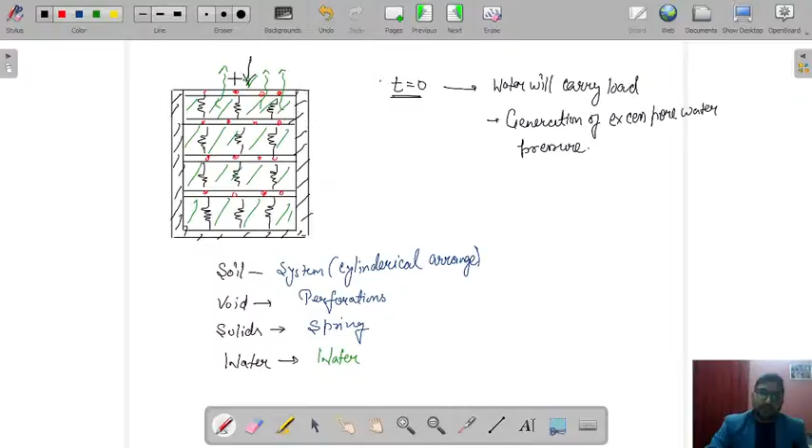Now what is excess pore water pressure? The pressure above the initial value. Suppose I put a piezometer in the middle of this layer, another piezometer at this point, a third piezometer at this point, a fourth piezometer here. Initially the level of water in these piezometers is going to be here. This is the water level.

Now suppose we have applied a stress of sigma. If this stress is taken by water, the rise in the level of water is going to be sigma upon gamma W, right? So the water level rises by H. It means the excess pore water pressure is equal to gamma W into H, yes or no? So this was the arrangement.

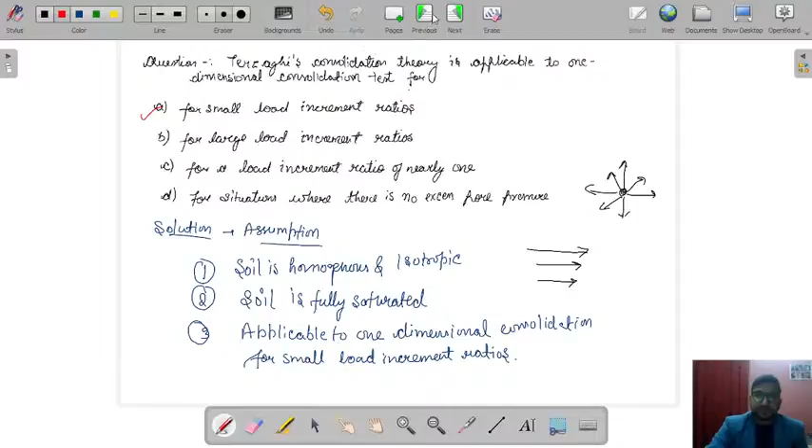Okay, let's move to the next question. Try to solve this one. The question is MCQ type, meaning only one of the options will be correct. The question reads: due to the construction of a new structure, the average vertical pressure at the center of a 2.5 meter thick clay layer increases from 100 kilopascal to 200 kilopascal.

A laboratory consolidation test was performed on a 20 mm thick undisturbed sample of the clay under applied stresses of 100 kilopascal and 200 kilopascal. The void ratio of the sample was found to be 0.9 and 0.786 respectively. Compute the primary consolidation settlement.

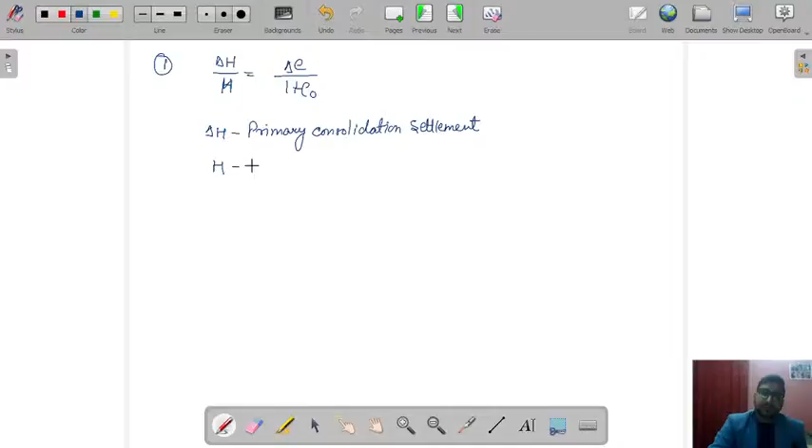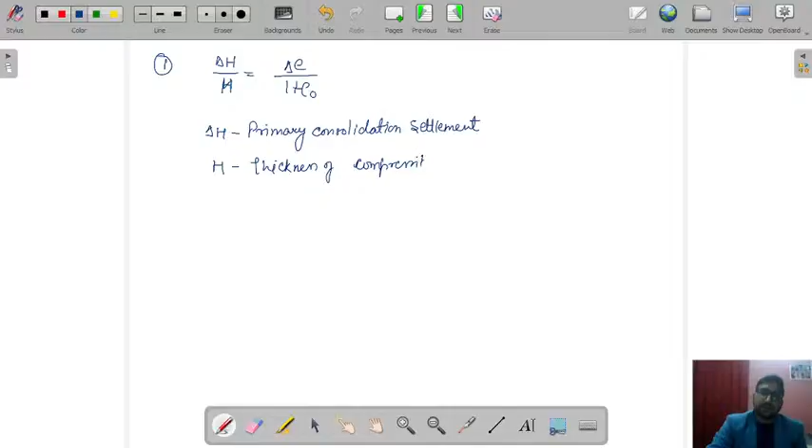So you can find the primary consolidation settlement. Here delta H is our primary consolidation settlement. What is H? H is the thickness of compressible layer. What is delta E value? Delta E is our change in void ratio.

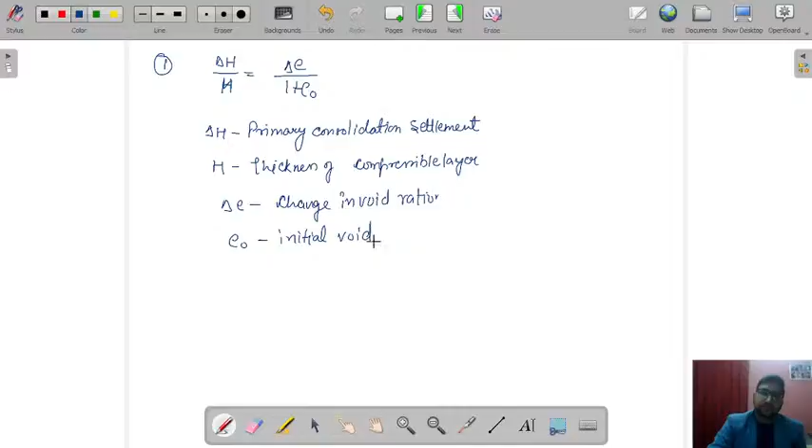What is E naught? E naught is our initial void ratio. Second, we know delta H is equal to H naught mv delta sigma bar. What is mv here? mv is coefficient of volume compressibility. mv is given by Av upon 1 plus E naught.

Now what is this Av? Av is our coefficient of compressibility. I'm assuming that you know what is coefficient of compressibility. It is the slope of curve between the effective stress and void ratio. With change in effective stress, what is the change in void ratio? The slope of that curve is our coefficient of compressibility. It represents the magnitude of consolidation. Right.

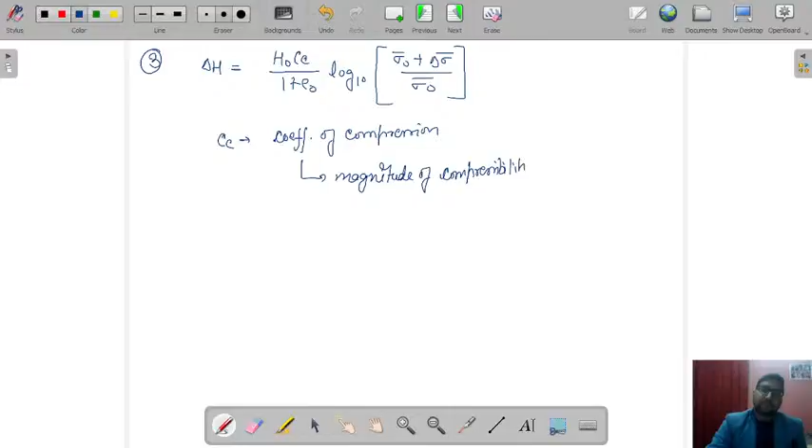Now just see what data are given. Delta sigma bar is given for the 2.5 meter thick layer. Also delta sigma bar is given for the 20 mm sample which we have tested in the lab. The change in void ratio is given from 0.9 to 0.786. Now as the increment in stresses are same, it means your MV value is going to remain same.

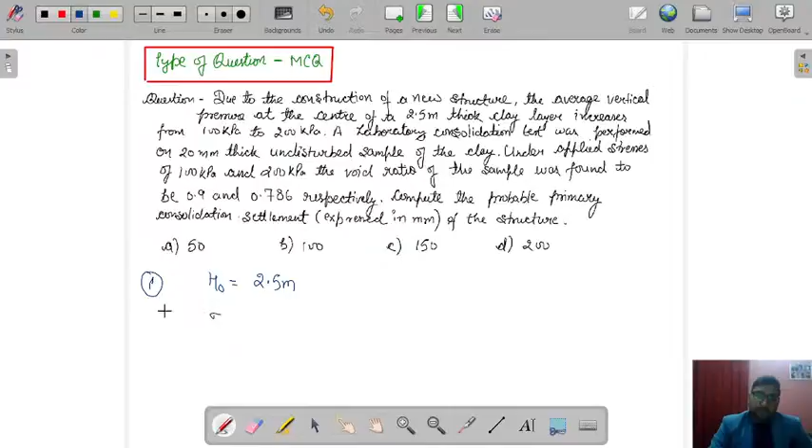Right. So first method, how we can calculate? H naught is our 2.5 meter. Sigma naught bar is given as 100 kilopascal. Sigma 1 bar is given to us, that is 200 kilopascal. Now this is for the soil in the field. Also, the soil sample which we have taken for the lab test is also given.

What is H naught here? 20 mm. What is sigma naught bar? 100 kilopascal. Let's take it as sigma 1 bar. Sigma 1 bar is 200 kilopascal. Now, initial void ratio is given. When stress was 100, void ratio is given as 0.9. Final void ratio is also given as 0.786.

Can we calculate the value of MV? MV is equal to AV upon 1 plus E naught. AV is the change in void ratio with change in effective stress. This type of curve we generally get. Here it is void ratio, here it is our effective stress. So initially the effective stress was 100, then void ratio was 0.9.

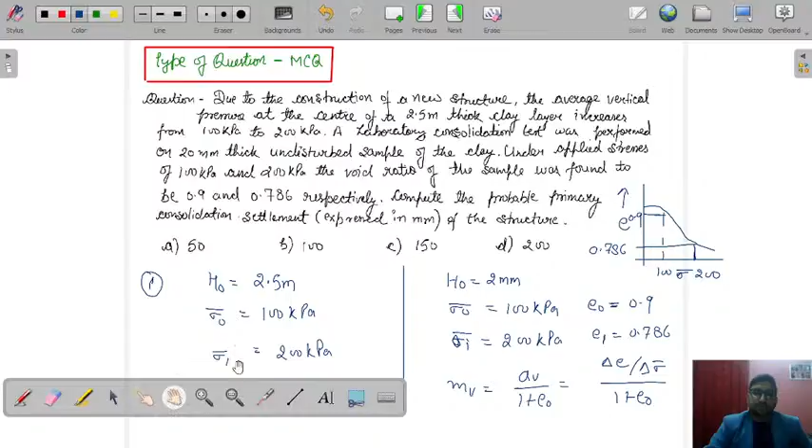So, just put the values. Delta e, 0.9 minus 0.786, by 200 minus 100, divided by 1 plus e naught, 1 plus 0.9. Can you give me the value of mv? What is the value of mv? So mv value we are getting as 0.0006.

What will be the unit? Meter square per kilonewton, since stress is in kilopascal. Right. Now mv value is same. I can calculate delta H here. I need the settlement delta H. It is equal to H naught mv delta sigma bar. What is the value of H naught? 2.5. What is the value of mv? 0.0006, into delta sigma bar is 200 minus 100, that is 100.

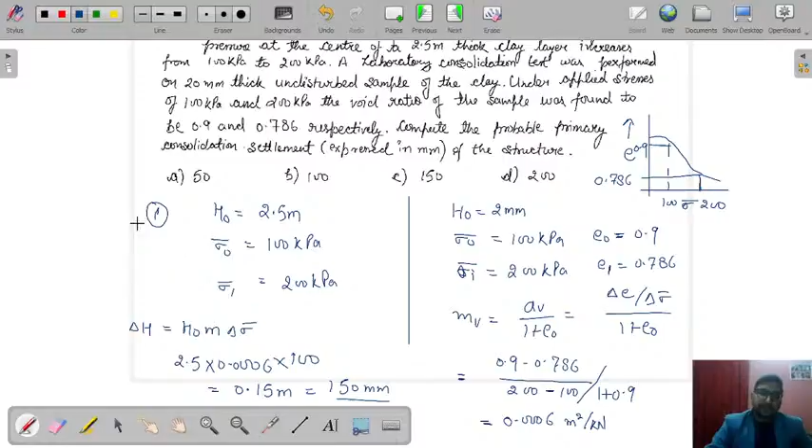So 0.15 meter, or you can say we have to answer in mm. It is 150 mm. You can also calculate directly without calculating mv. As the stress change values are same in your original soil and in the soil sample which you have taken to the lab, you can directly use delta H upon H naught is equal to delta e upon 1 plus e naught. You can also do it this way.

So H naught is our 2.5, delta e 0.9 minus 0.786, upon 1 plus 0.9. Still you will get same value, that is 150 mm. Okay.

Is there any doubt with this question? I hope this question is now clear to you. Let me know in the comment box if any student is having any doubt. Okay. So we will move to our next question.

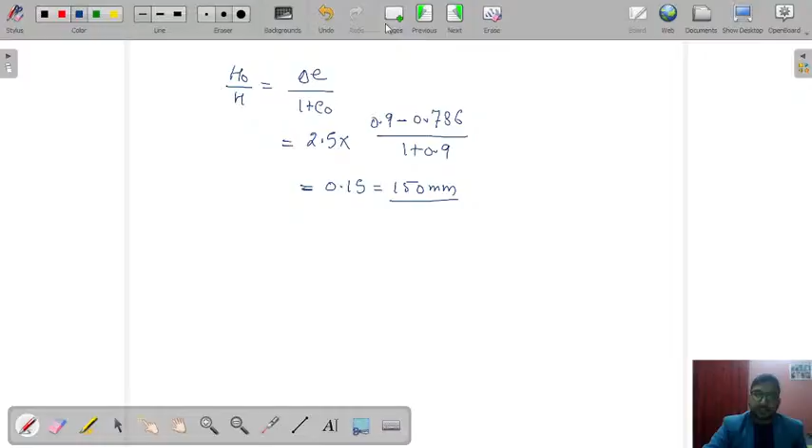This is our next question from the settlement. Answer this one. The consolidation settlement of a new structure founded on a 6-meter thick layer is estimated as 77 mm. The structure was found to have settled by 21 mm in 8 months after the completion of construction. If the clay layer is underlain by rock and overlain by a layer of coarse sand, the coefficient of consolidation of the clay layer will be?

You have to answer the coefficient of consolidation of clay layer. Answer this one. Just try to solve. See the data. Make a flow chart to solve the question. If that flow chart is complete, then only go for the question. It's not like you note the data, try to solve it, and after a point conclude that you don't know the concept to solve this question. That will be a time waste, right?

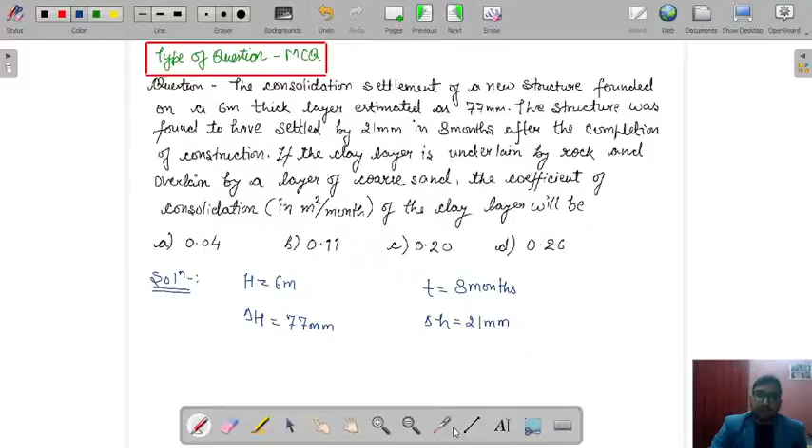Now at any particular time, at t equal to 8 months, your settlement value is 21 mm. Can you tell me what will be the degree of consolidation? Degree of consolidation represents, at any particular time, how much percentage of consolidation has taken place.

So degree of consolidation is delta small h upon delta capital H into 100. Okay, 27.27%. It is less than 50%. It means if we calculate the time factor, it will be equal to pi by 4 into u percentage squared.

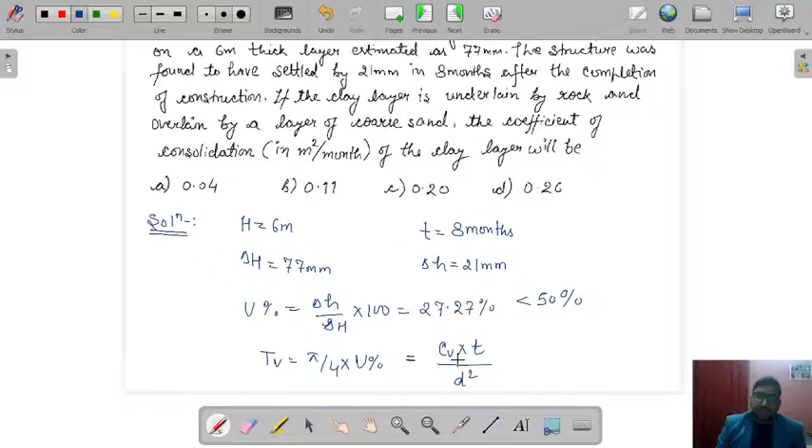We also know the value of TV. It is CV into T upon D square, where CV is our coefficient of consolidation, T is the time taken, D is the drainage length. Now suppose this is the soil sample.

Here it is clay, this is our sand, and here it is a rock. It means this layer will be an impervious layer and this layer is going to be a pervious layer. The drainage path is the maximum distance taken by a water molecule to expel out from the layer. So the value of D is 6 meters.

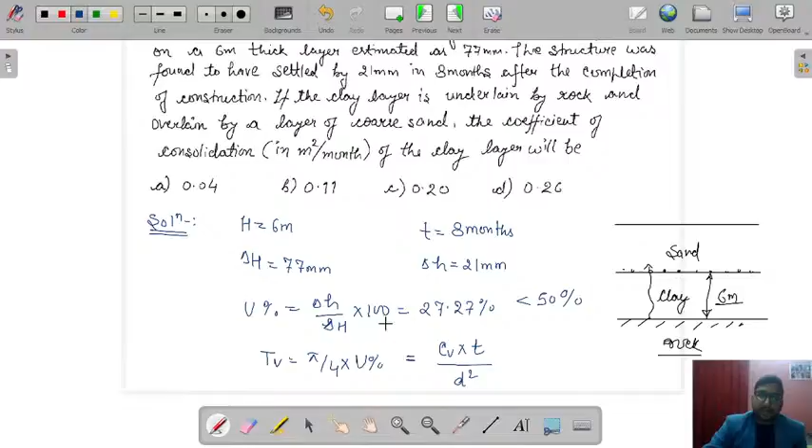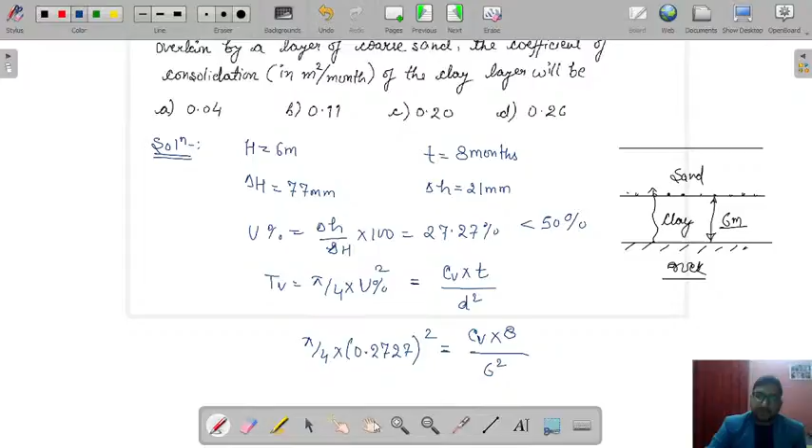Okay, so just put the values. Pi by 4 into 0.2727 squared is equal to CV, which needs to be calculated, into T, that is 8 months, divided by 6 square. Can you give me the value of CV? What is the value of CV you are getting from here?

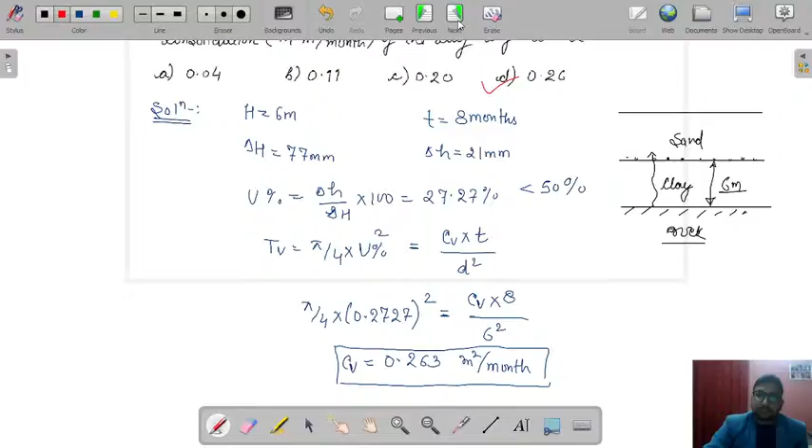0.263. What will be the unit? Meter square per month, as the time is in months. So the correct answer for our question will be option D. Yes, Harsha has given the correct answer, 0.26. Okay, next question.

A clay sample, originally 28 mm thick, at a void ratio of 1.02, was subjected to compressive load. After the clay sample was completely consolidated, its thickness was measured to be 23 mm. What will be the final void ratio? Try to answer this one.

Again, the hint is there is a settlement from 28 mm to 23 mm. Whenever there is a case of settlement, we have discussed three formulas. So try to see according to which formula the data is given to us. Before starting the question, can you tell me the value of settlement? By what amount has this clay sample settled?

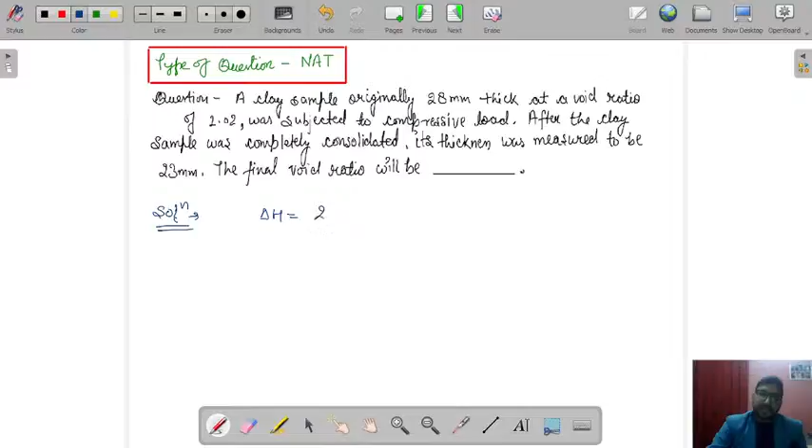Its original thickness was 28 mm. After complete consolidation, its thickness is measured to be 23 mm. Can you tell me the value of settlement? The initial thickness was 28 mm, and finally after settlement the thickness became 23 mm. So the value by which our soil layer settled is 5 mm.

Now this 5 mm settlement is of which layer? Having a thickness of 28 mm. When the thickness was 28 mm, the void ratio is given, meaning the initial void ratio is 1.02. Now settlement values and void ratio are given, so we can use delta H upon H equal to delta E upon 1 plus E naught.

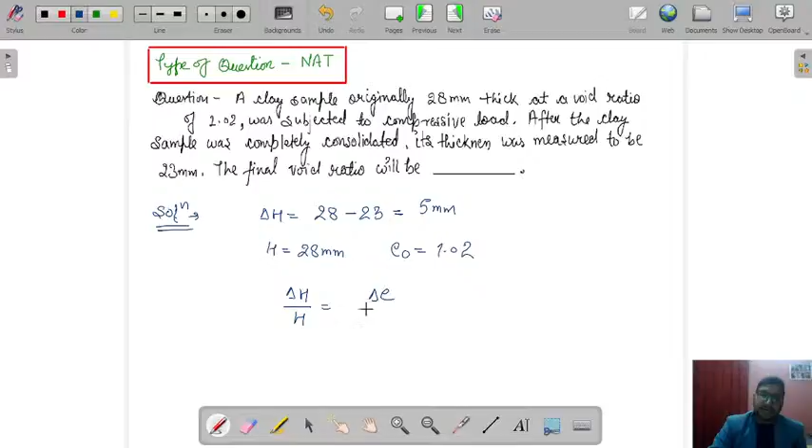What is delta E? Delta E is change in void ratio, that is initial void ratio minus final void ratio, divided by 1 plus E naught. Delta H value is 5 mm, total thickness 28 mm, equals 1.02 minus E final, which we need to calculate, upon 1 plus E naught, with initial void ratio 1.02.

Can you tell me the final void ratio? What is the final void ratio you are getting? So the final void ratio is 0.66. Our answer will be 0.66.

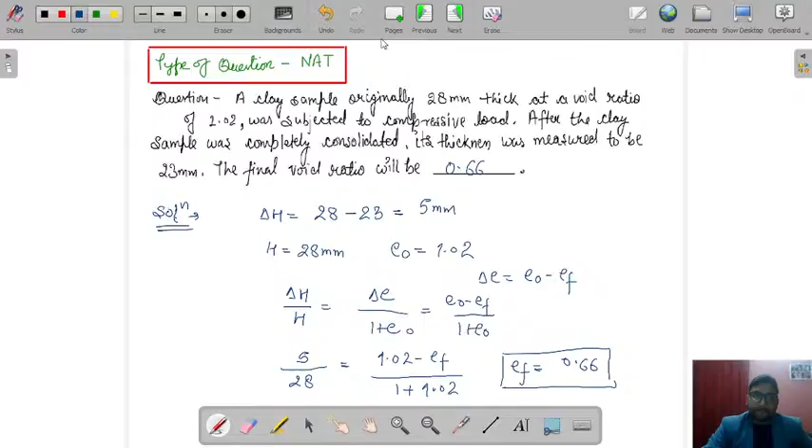Okay, now this question is clear. Just move to next question.

Now it is given, if the time required for 50% consolidation of a remolded soil sample of clay with single drainage is T, then what is the time required for 80% consolidation of the same sample of clay? Same sample of clay. Just try to answer this one.

Just try to answer. If the soil sample is same, which value is going to be constant? Now this is your hint. When it is given that the same sample of clay, it means you can compare both the condition on those values which are constant.

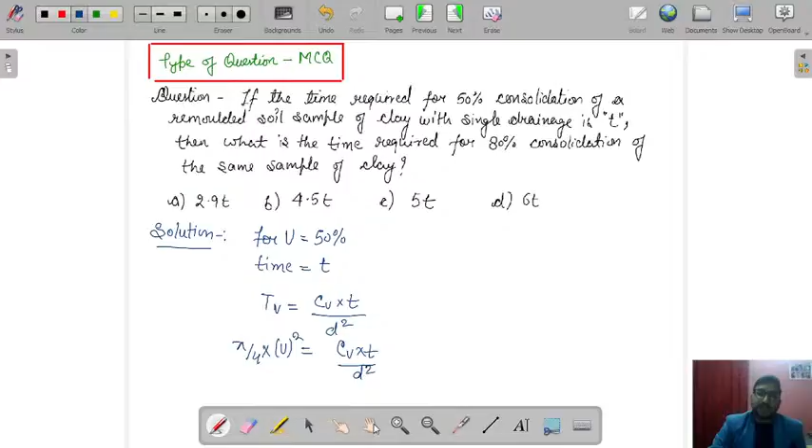For U is equal to 50%, what will be the value of Tv? Pi by 4 into U square. It is going to be equal to Cv into t by d square. Now just put the values. Pi by 4 into U is 50%, 0.5. Cv by d square, let's take t here. Just make it quick. Equation 1. Now let's see the second case.

For consolidation it is given 80%. It is greater than 60. So Tv will be equal to 1.781 minus 0.9332 log base 10 of 100 minus U in percentage.

Tv will be equal to Cv into, suppose the time taken for 80% consolidation is T1, by d square, as there is no change in the drainage length. Just put the value, it will be equal to 0.566, right? Now Cv upon d square, it is 0.566 by T1.

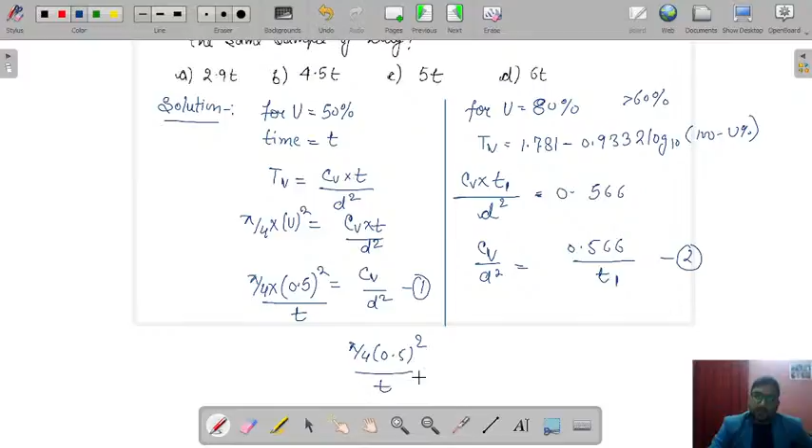Now just compare equation 1 and 2. So pi by 4 into 0.5 square upon t will be equal to 0.566 upon T1. Try to calculate the value of T1 in terms of t. 0.566 divided by pi by 4 into 0.5 square into t. This is 2.88 t.

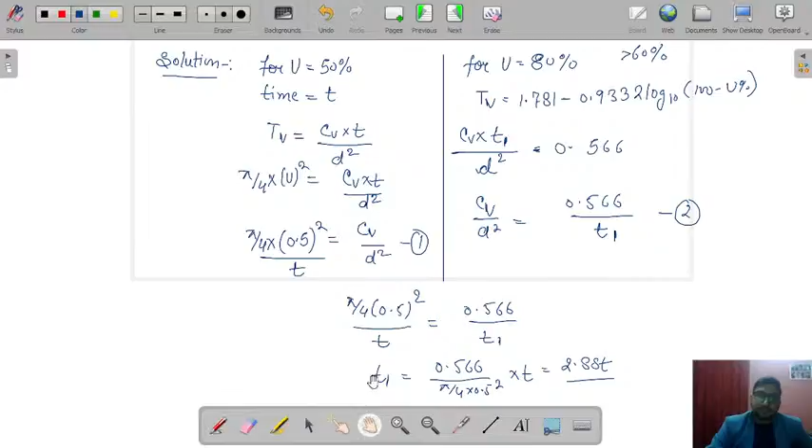So the time taken for 80% consolidation will be equal to 2.9 times of t, or you can say 2.88 times of t. So the answer for this question will be option A. So what is the trick here? Whenever two situations are given to you, just try to find out on which basis you can compare those two situations, right? Okay, just move to next question.

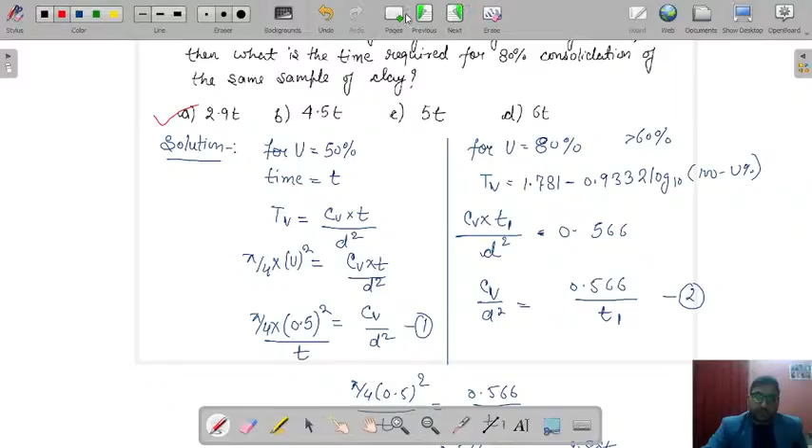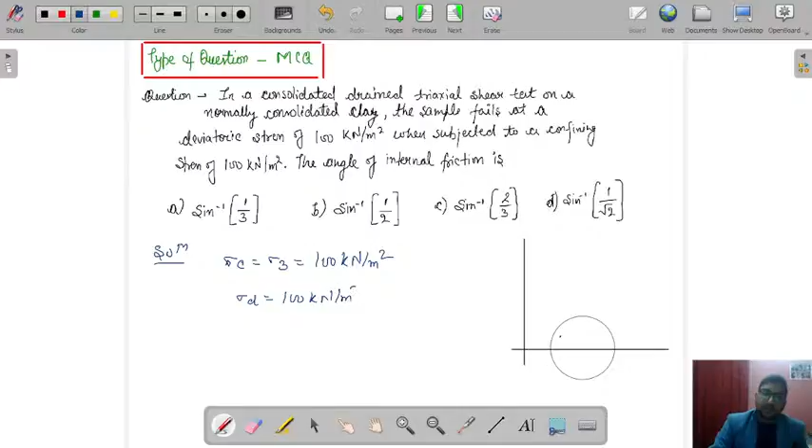What will be major principal stress? Sigma 1. It will be deviatoric stress plus your confining pressure, equal to 100 plus 100. That is 200. Now if I represent this value in your Mohr circle, this is our sigma 3, that is 100. This is our sigma 1, that is 200. So here it is sigma, here is shear stress tau.

Now it is given that consolidated drained test. CD test. What will be the value of C? So for CD test, value of C is going to be 0. Phi value we need to calculate.

So in this Mohr circle, if I represent C is equal to 0, it means the failure plane will pass through the origin like this. So here C is 0. What this angle represents? This angle is our phi. Right? Now suppose this is the center of the circle. I am drawing a perpendicular from here to the center. This is perpendicular.

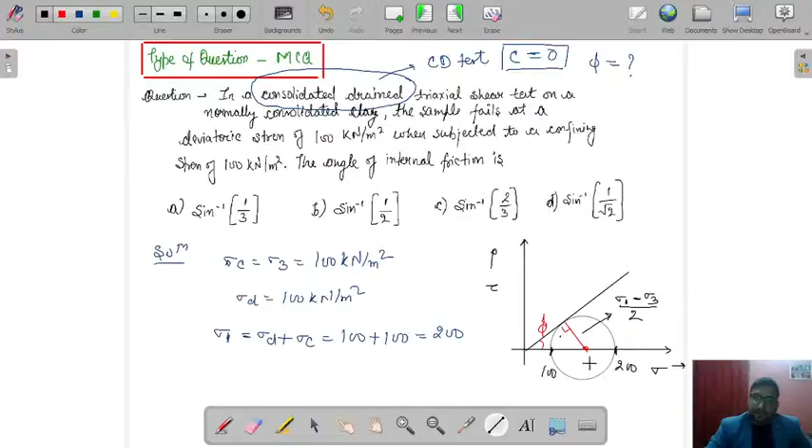Can you tell me what will be the radius of this Mohr circle? It will be equal to shear stress value, sigma 1 minus sigma 3 by 2. What will be the distance of center from the origin? It will be sigma 1 plus sigma 3 by 2.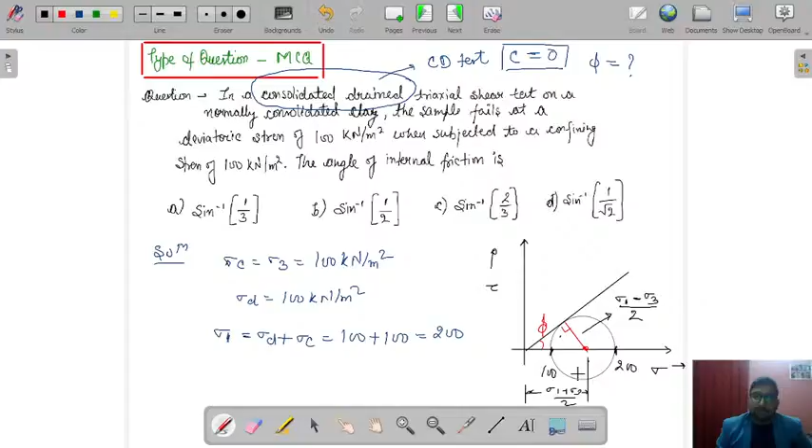Now I know what is the value of sigma 1. I know what is the value of sigma 3. Can we find the value of phi from here? Which angle should I use? So can I say sin phi? Sin theta is perpendicular upon hypotenuse. This is our perpendicular, sigma 1 minus sigma 3 by 2. What is our hypotenuse value? Sigma 1 plus sigma 3 by 2. It is equal to sigma 1 minus sigma 3 upon sigma 1 plus sigma 3.

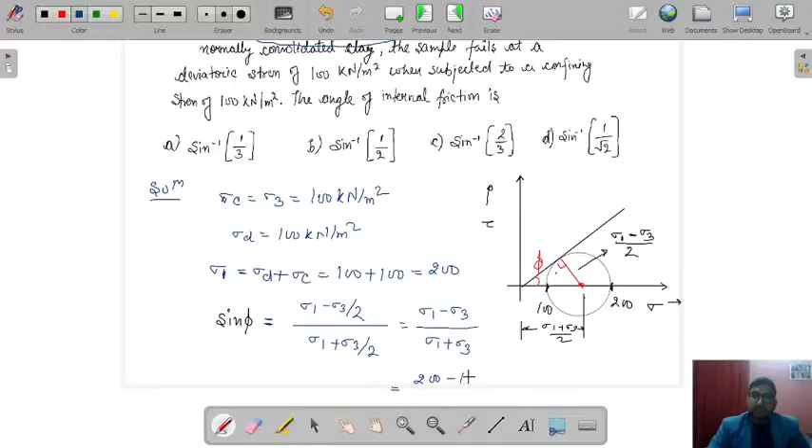Just put the values. Sigma 1 is 200, sigma 3 is 100, 200 minus 100 upon 200 plus 100. So it is equal to 1 by 3. So phi value, if we calculate from here, it will be sin inverse 1 by 3. Okay. So I hope now this concept is clear, how to use Mohr circle for this type of question.

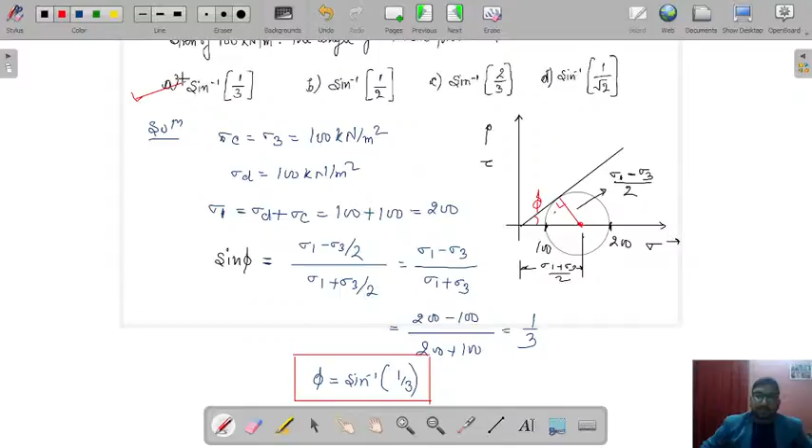So the correct answer is option A. Our option A is correct. So phi is equal to sin inverse 1 by 3. Right. Okay, let's move to next question.

At a depth of 5.5 meter below the ground surface at a site, a Vane shear test gave a torque value of 6145 Newton centimeter at failure. The vane was 12 centimeter high and 6 centimeter in diameter. The shear strength of soil, needed to be calculated in kilonewton per meter square, will be? You have to assume that shear has occurred at both top and bottom of the vane.

Now this is the question from Vane shear test. Let me know in the comment box if Vane shear test is a field test or a lab test? Can anyone tell me that the Vane shear test, it is a field test or it is a lab test?

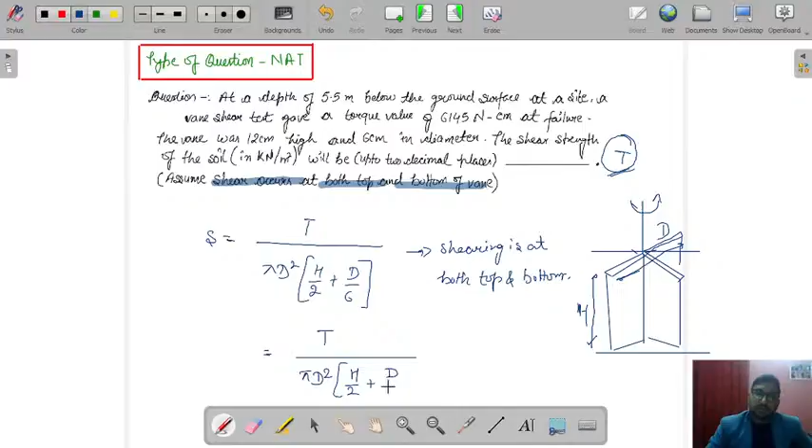Now, if shearing is only at the bottom, this relation will be T upon pi d square (h by 2 plus d by 12). This is the only difference, when shearing is at the bottom only.

Shearing means when you rotate this, if the top layer is shearing the soil and the bottom layer is also shearing the soil, that is two-way shearing. If this part is above the soil layer, only the bottom layer will shear the soil. That is one-way shearing. So here it is given that shear occurred both at top and bottom of the vane. It means we are going to use this one. So let's take the data.

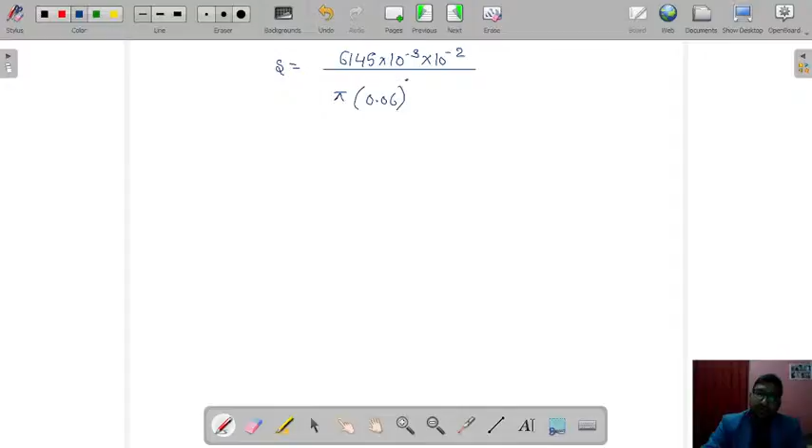S is equal to, T value is given as 6145. What is the unit? Newton centimeter. 10 to the power minus 3 becomes kilonewton, 10 to the power minus 2 becomes meter. Divided by pi d square. What is the value of d? 6 centimeter, so 0.06, upon h by 2 plus d by 6.

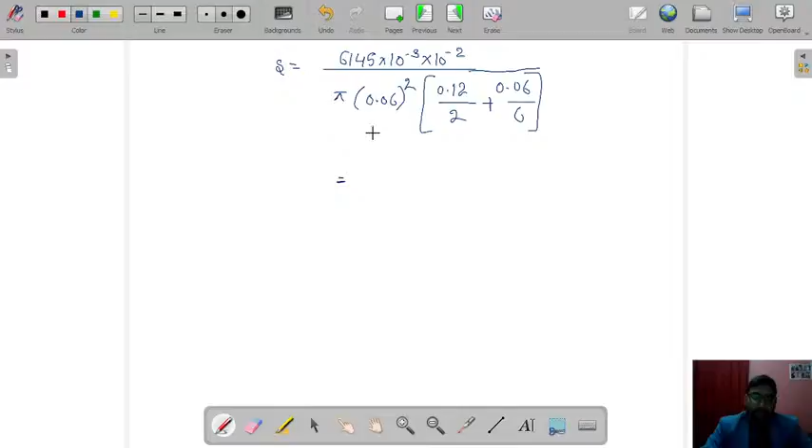What is the value of h? 12 centimeter is the height. So 0.12 by 2, plus d by 6, 0.06 by 6. Now it will be in kilonewton per meter square. Try to calculate this and give me the value in kilonewton per meter square.

So after solving this, we are getting 77.62 kilonewton per meter square.

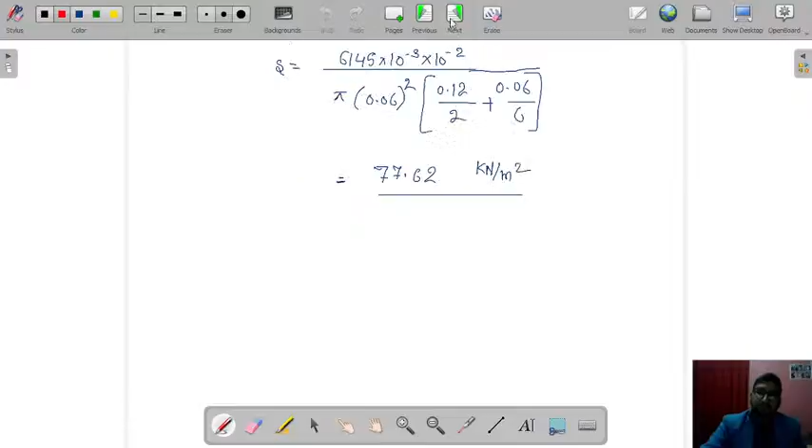Now just move to next question. If Cu is the undrained cohesion of soil and Qu is the unconfined compressive strength of the soil, then the radius of Mohr circle for unconfined compression test result will be?

Now give me the answer. Before that, just see one trick. Whenever C value is not given in any question, if only one data is given for sigma 1 and sigma 3,

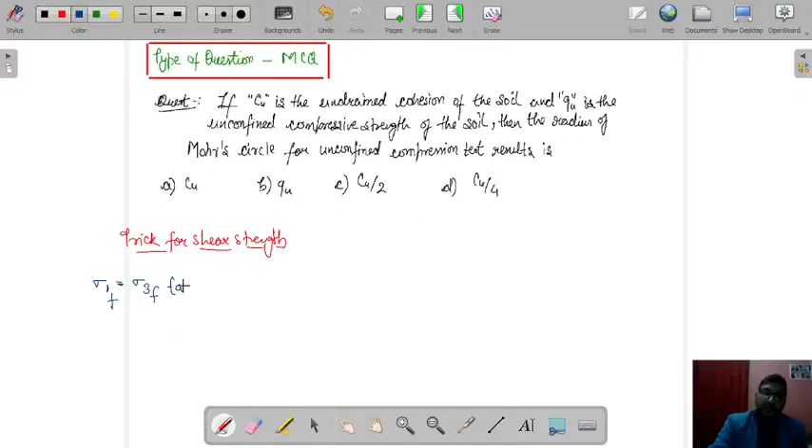trick for shear strength of soil. In this unit you will need this trick. One major formula for this unit is that at plastic stage, sigma 1 at failure is equal to sigma 3 at failure tan square (45 plus phi by 2) plus 2c tan (45 plus phi by 2).

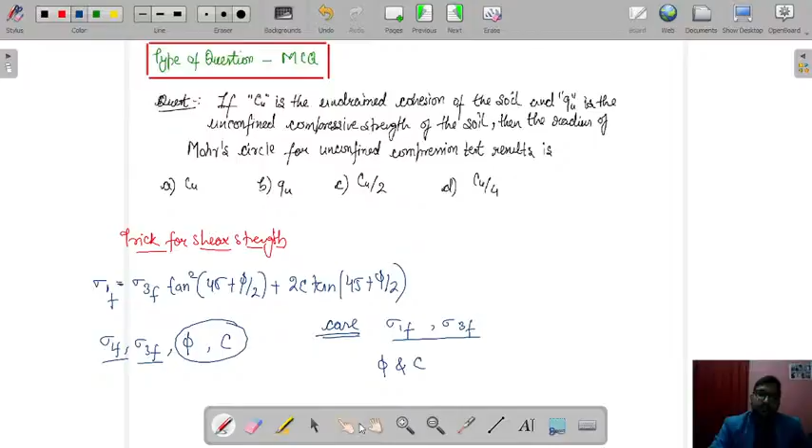Now suppose second case, sigma 1 at failure and sigma 3 at failure is given, and you need to calculate phi and c. You will also need two equations to find these two unknowns. But suppose in exam you have been given only one equation in terms of sigma 1 and sigma 3, which will be general in your case.

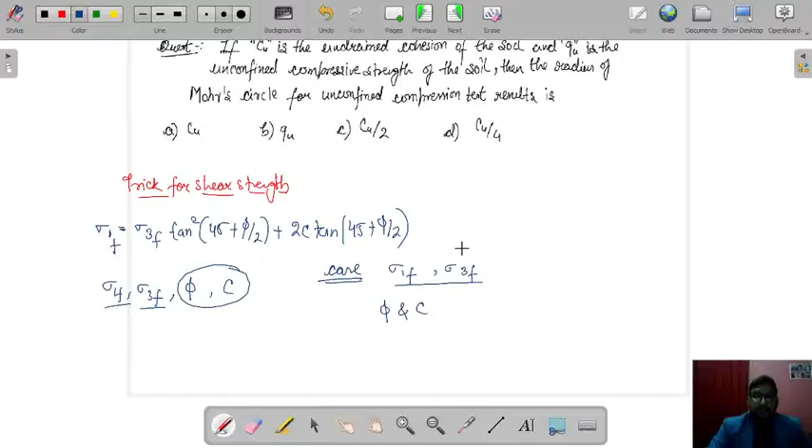So in that case, just remember, in your triaxial test we have unconsolidated undrained test, UU test, we have consolidated drained test, and we have CU test. For these two tests, C is going to be 0, your cohesion value is going to be 0. For UU test, your phi value is going to be 0.

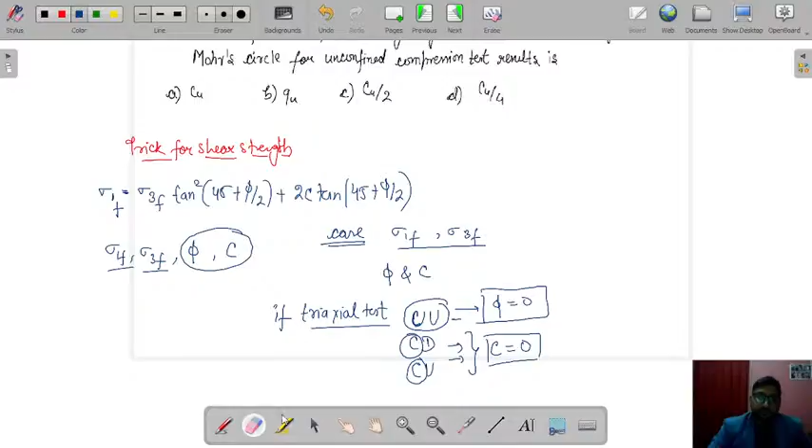So if there is only one equation in terms of sigma 1 and sigma 3 and you need to find C and phi, based on the type of triaxial test you can assume either C as 0 or phi as 0. If it is UU test, phi will be 0. If it is consolidated drained or consolidated undrained test, C will be 0. Now back to the question. It is unconfined compression test, it means phi value is 0.